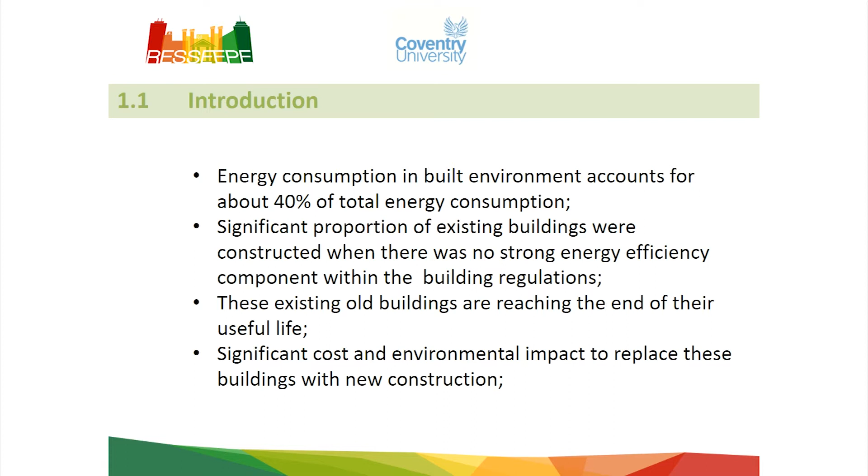So I think just to set the scene for why the work that we are doing is very important. We know that energy consumption in the built environment accounts for about 40% of total energy consumption and about 50% of carbon emission as a result. So that's significant. If we are to reduce the impact that the built environment has on our planet, then we have to basically consider improving these buildings to a higher performance standard.

At this point in time, the challenge that we're facing is a significant proportion of these buildings were constructed a long time ago, and the energy efficiency standard wasn't very strong at the time. Therefore, a lot of them are coming to the end of their useful life. And when I say useful life here, I'm referring to when the building cannot meet the energy and environmental performance standards expected today.

So if we said that we're going to replace all the existing buildings with new ones, that is not feasible for a number of reasons. There will be significant cost associated with constructing new buildings, and there will be significant environmental impact. Somebody asked me the question earlier, what is the environmental impact of the PCM? What that means is, what is the impact of the materials that we use to construct our built environment? If we demolish all of our buildings, then we have to use new materials to construct new buildings.

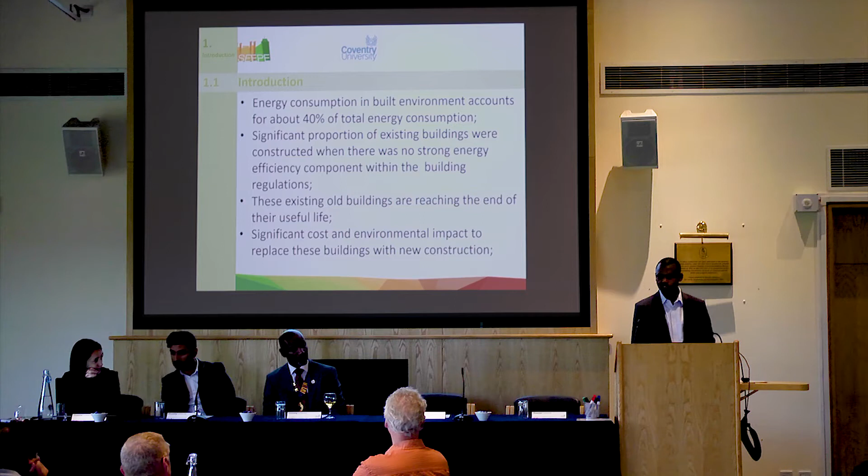And there will be a lot of environmental impact, embodied energy of those building materials and components built into that process. So that is not the best strategy to move forward. Therefore, we have to refurbish our existing buildings. We have to improve the performance standards. There are a number of benefits to energy efficiency retrofit or improving the performance of existing buildings.

There are economic benefits, such as the cost savings and economic stimulus. So you save a lot of cost compared to constructing new buildings. And obviously, the small and medium-sized companies are the companies that normally get involved in retrofitting existing buildings, so there is some economic stimulus associated with that. Not only small companies, but big companies as well. Improvement in property value: the value of your property will increase without the associated cost of constructing new buildings.

And obviously the impact on public finances. If Coventry University decides, okay, we want to replace all the existing buildings, that will be a significant cost implication. So if that is extended to the NHS and other public organizations, that will be a major issue for public finances in the UK and other parts of the world as well.

There are societal benefits, the improvement in comfort and health and productivity of building users. As you improve the environmental conditions within the built environment, as we were trying to do with the phase change materials, you improve the productivity of the building users, and the health of the building users as well, as the quality of the built environment improves.

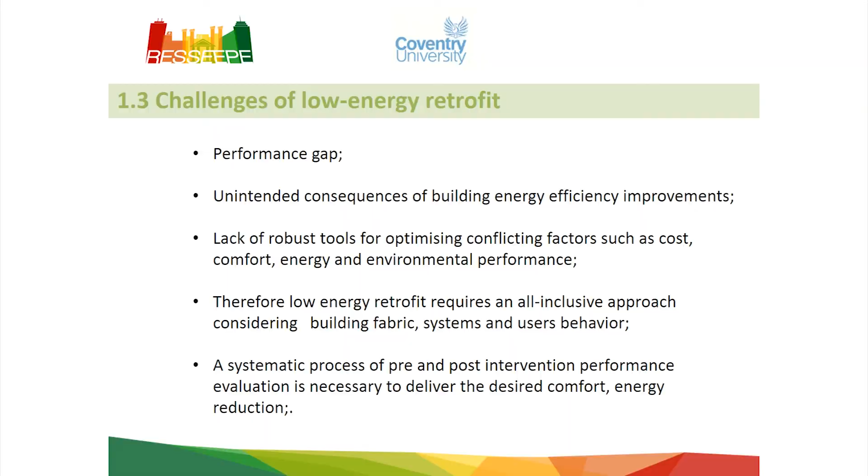If that happens, then we have to start considering new electricity generation capacity across the country, which is the last thing the UK wants to do in terms of cost and in terms of environmental impact as well. Okay? It's not straightforward. Retrofitting existing buildings is a challenge, and we have to recognize those challenges and find solutions to those challenges.

There is the issue of performance gap. This is not limited to only retrofitting of existing buildings. It is a phenomenon that the industry is dealing with, where the building is performing worse than the design performance, and the majority of buildings are performing worse than their design performance. If you consider the energy performance certificate, which is the predicted energy consumption of the building, and the display energy certificate, which is the operational energy consumption of the building, there is a huge mismatch.

And this is not only limited to retrofitting of existing buildings, but much more of a challenge for retrofitted buildings, because you don't have enough control over the sort of action that you can take to improve the performance of all the components of the building. And then we have the other issue, which is a core issue in terms of retrofit, which is the unintended consequences of building energy efficiency improvement.

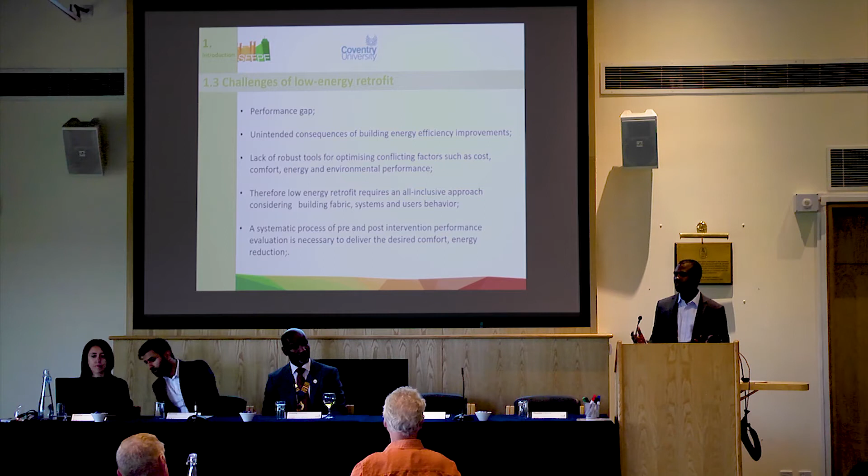We improve the energy performance of the building fabric and obviously the building air tightness and so on, without any consideration for ventilation. And as a result, the health of the building occupants and the building owners and the building fabric is compromised. Therefore, we have to think about the holistic approach to building energy efficiency improvement. When we are improving energy efficiency of the building fabric and air tightness and so on, we have to start considering the comfort of the users as well, the ventilation and indoor air quality in the spaces.

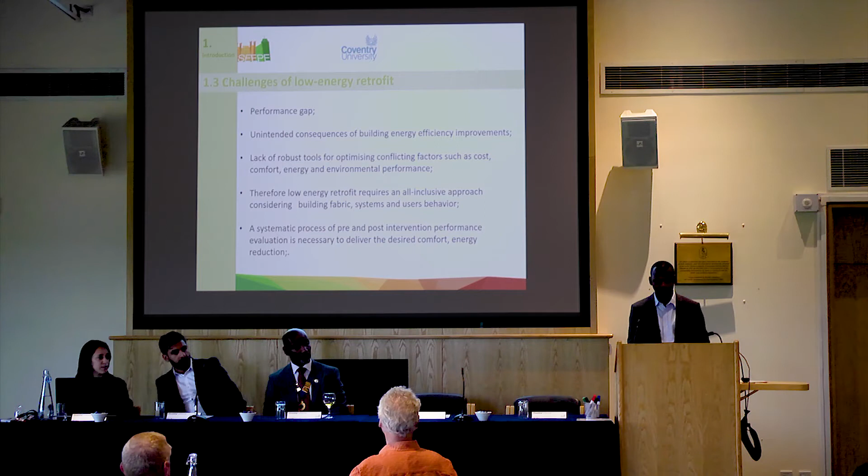The lack of robust tools for optimizing the conflicting factors that I just highlighted. You want to improve energy, but you want to improve comfort within the building. You want to improve air quality as well. We don't have any robust tools and approaches for optimizing these conflicting factors. Cost as well is part of the equation, comfort, energy consumption, and environmental performance, which is part of what the project is trying to achieve.

We require an inclusive approach, considering the building fabric, systems and user behavior as well. Users are a core component of how the building will perform. Are we taking the views of the users into account when we are designing our solutions? It's a big question mark. Most of the time, perhaps, engineers and construction professionals design buildings without effective stakeholder engagement. And there is significant evidence that in order to achieve the socio-economic and environmental benefit of any building energy efficiency improvement, stakeholder engagement has to be a core part of that process and not a process that happens after the event.

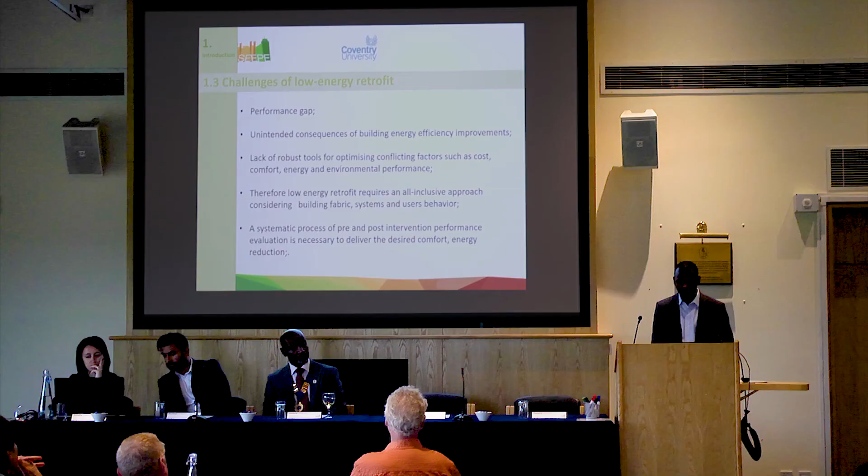And in order to avoid some of these performance gaps and unintended consequences, we also need a systematic process of pre- and post-intervention performance evaluation. We need to evaluate the performance of the building before any intervention and the performance of the building after any intervention. We learn from those processes and we improve our energy efficiency improvements in the future. So we want to make sure that we deliver the appropriate comfort and energy consumption. It's not the design, but actually are we delivering in reality? So we need to monitor before and monitor after.

I will give a couple of minutes description of the RESSEEPE project, which is retrofitting solutions and services for the enhancement of energy efficiency in public buildings. The project is basically a 4-year project. We are at the tail end of it at the moment. We have 25 different partners from 10 different countries from across Europe. That obviously suggests that there is a significant amount of diversity in the project. The category of partners include the demo sites, research institutions, industrial partners who produce some of the materials that we showed you earlier, social housing organizations, and different disciplines, engineering, energy efficiency, building construction, and so on.

The core aim of the project is to improve building energy efficiency through retrofit, and to set up a diagnosis methodology for an integrated renovation of public buildings and district levels. So we want to be able to diagnose the current performance of the buildings and then propose solutions that suit that particular building. In particular, when we showed you earlier the phase change materials, that was done based on the understanding of the challenges being faced within the building itself, through the earlier stakeholder engagement and the diagnosis that has been developed in the project.

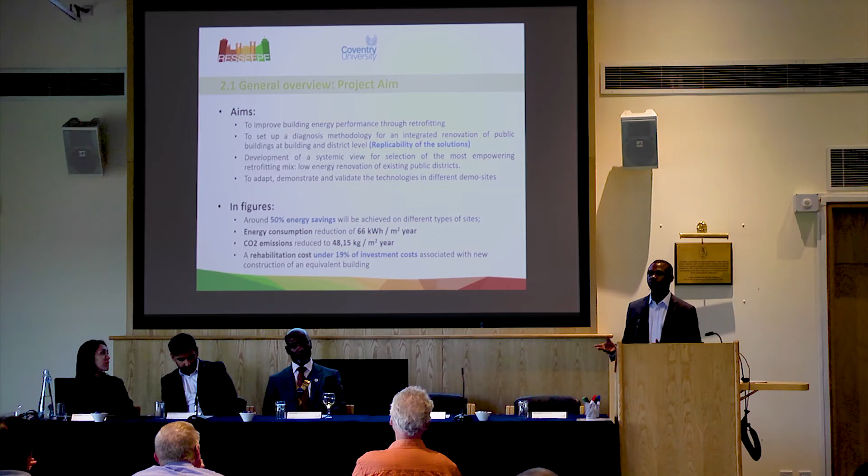Development of a systemic view for selection of the most empowering retrofit mix. I think one of the challenges that we face is what mix of technologies can we use? Should we just focus on the fabric? If we do that, as I mentioned earlier, then we have the unintended consequences that I was talking about. So what is the right mix of retrofitting technology that we can use?

How can we adapt, demonstrate, and validate these technologies on real buildings and monitor the performance of these technologies? As we mentioned before, technology providers can tell you how fantastic their product is, but really, in reality, the performance of these technologies doesn't match up to those that had been publicized by the various organizations.

In figures, basically, we're trying to achieve a 50% energy saving in the different demo sites. That was the initial project intent. Energy consumption reduction of about 66 kilowatt hour per meter squared per year, and carbon emission reduction of about 48.15 kilogram per meter squared per year, and a rehabilitation cost of 19% of investment costs associated with new construction.

The project is divided into 8 different work packages. The first work package is basically the coordination and management work package, and then we have the development of a diagnosis methodology, which Mr. Kasim will later on talk about. Then we have work package 3, which is technologies for retrofitting solutions, basically the identification and development of some of these technologies, and the development of design methodology for energy efficient building and district renovation.

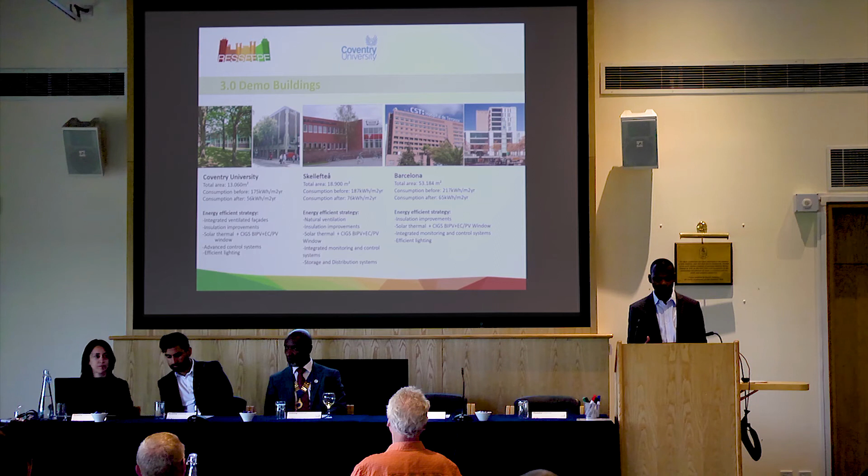At Coventry University, basically a total of about 13,000 meters squared area, energy consumption of the buildings of about 175 kilowatt hour per meter squared per year. So this is some of the energy consumption information about the various buildings that we are renovating, and some of the selection of technologies that we integrated within the various buildings. Monica will talk a little bit more about the selection of these technologies, but I thought that an overview of these technologies is important in this presentation.

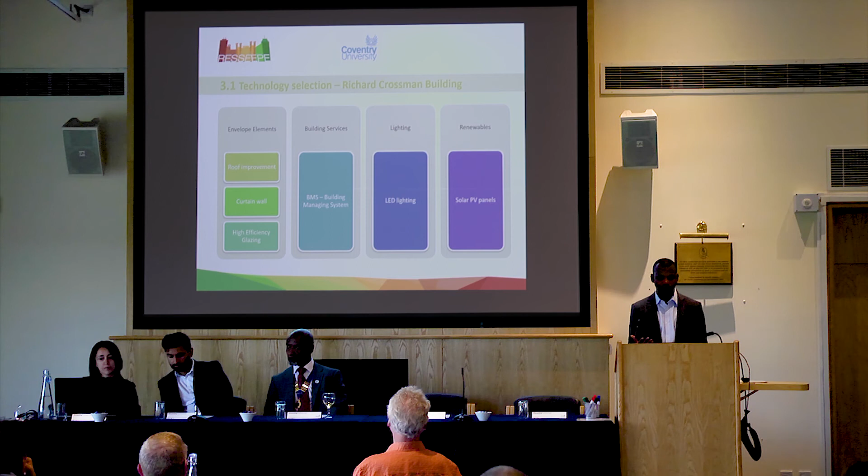Just to conclude, one of the issues or learnings from this project is the complexity when you have so many different partners, and I'm sure this discussion is happening within the industry, the issue of information sharing and communication. This project is very complex in that we have several partners and we have to share information with all of them. Coventry University managed the dissemination and communication platform, what is being generated within the project, how this information is being shared internally, and also the engagement with the various stakeholders.

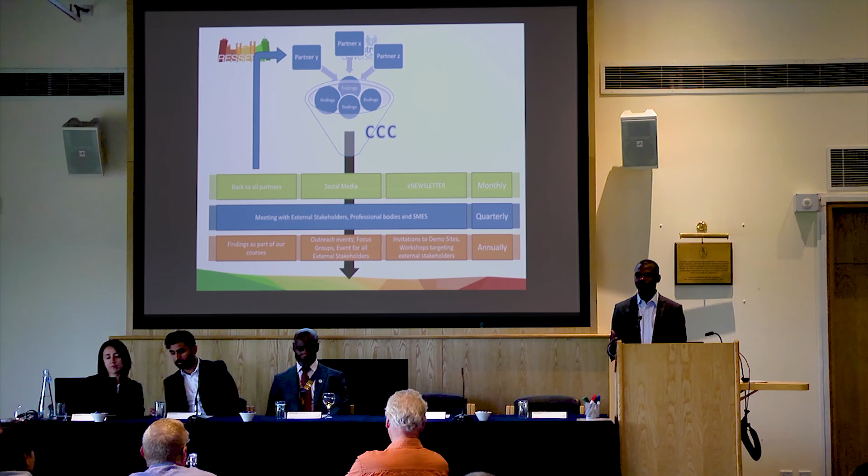And that brings us to the discussion of building information modeling. How could we have maybe used some of these building information modeling processes and protocols within the project? That could have really provided significant improvement in efficiency within this project. And this is definitely something we're learning and that we are going to do in subsequent projects. And I think that's me.